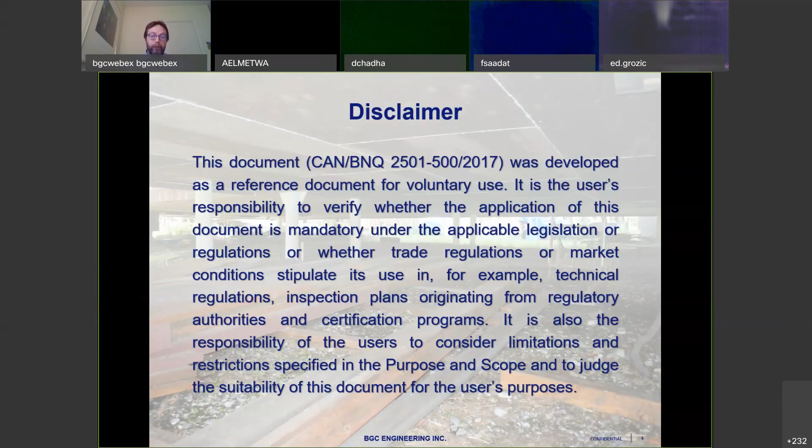Now, before diving into the actual standard, I also like to acknowledge that it's not just a one-person work. There are actually a large group of people that supported the development of this guidance. First of all, the Standards Development Committee. I'm not going to read all these names, but it's a large group under the chair of Sarah Brown. She was chairing this committee. And then there was the working group, which I had the pleasure to lead, as well as additional collaborators. All of these people helped develop this standard and made it possible that we do have this standard.

Now, the content of my presentation is in essence following the actual standard. So you will see the same headers and the same structure in the standard as you will see during my presentation. I will also have reference to specific sections of the standard that will show up in the presentation.

So we'll first start with the scope, we'll have a couple of definitions, then we'll go into how to plan the site investigation, we'll talk about the qualifications needed, and then the 2 levels that we propose for site investigation, which is a preliminary site evaluation and then the actual site investigation. And last but not least, the reporting and recommendation, which is an essential part of any geotechnical site investigation.

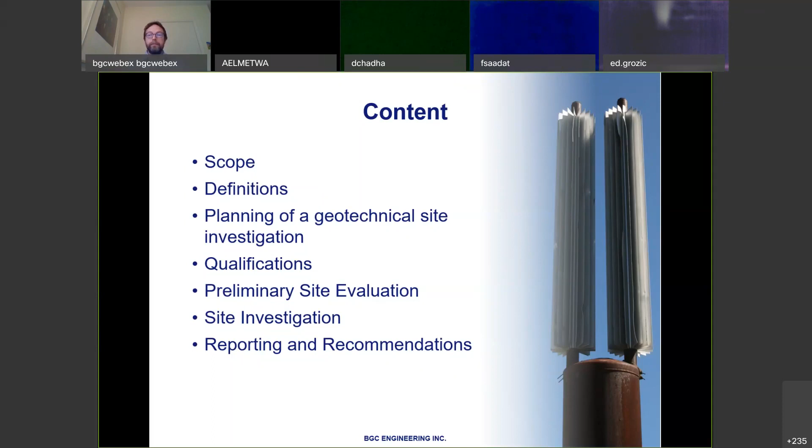Now, what is so special about the North or working in permafrost environments? The key here is that the permafrost, so the frozen conditions, make it challenging because we now have ground ice, and those that have worked in permafrost and in the North know that ground ice comes in various forms, different shapes, different colors, if you wish, and different temperatures. And the strength and the response of your foundation really depends on the response of the ground ice.

We also have saline soils. In particular, when you get close to the Arctic oceans, there are areas that have salinity. And when we have salinity, that affects the freezing point, in other words, how much of your ground is still frozen. So you may have unfrozen conditions at temperatures that are still below 0 degrees. So if we purely go by definition, then we would have permafrost, but it's unfrozen. So from a geotechnical perspective, this material acts like unfrozen material, but from a thermal perspective, it is actually permafrost. And on top of that, there is climate change.

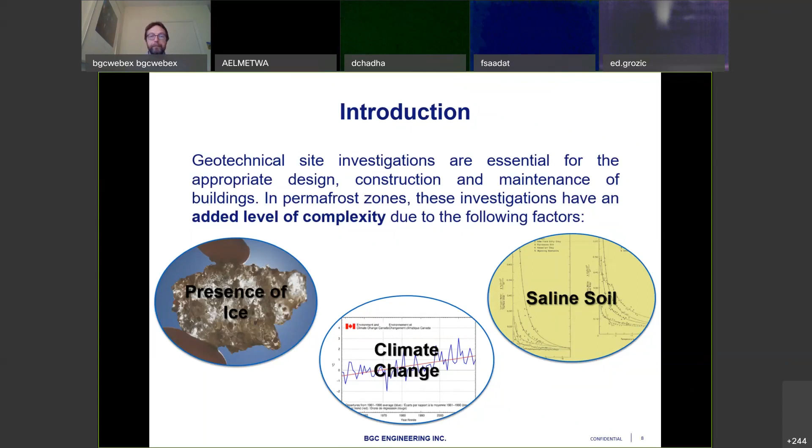Now, it's important to recognize that the level of detail of a geotechnical site investigation really depends on multiple factors. And that was one of the reasons why, when we developed this guidance, we didn't want to be too specific and too descriptive. So the idea is really to give the professional the tools to work and use their experience.

And also address the specific boundary conditions that we have in the Arctic. So it's really, this guide was developed to provide the information that will allow for the design and the maintenance of building with a reasonable time frame and cost. And we completely acknowledge that every case is different, it's not similar. So having just a one-fit-all solution does not work on all these different challenges that we see in the Arctic.

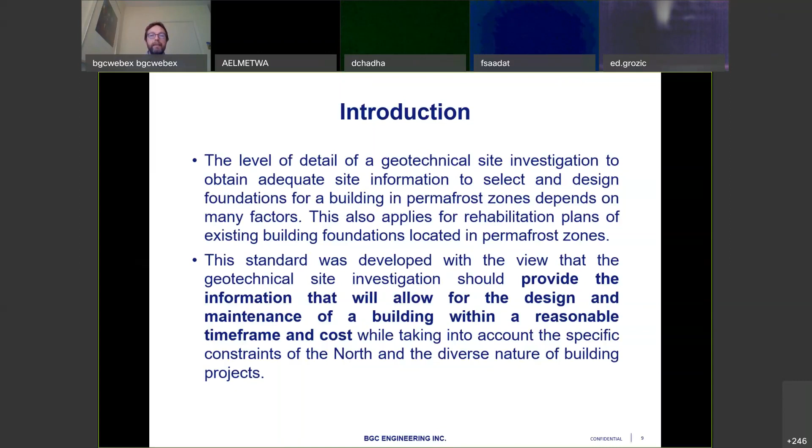And therefore, the focus of this document is to provide a consistent methodology. So the approach should be similar, so that geotechnical engineers, but also owners, understand what is to be expected and what needs to be done. We'll also focus on a dialogue between the designer and the owners, so that everybody understands where to go.

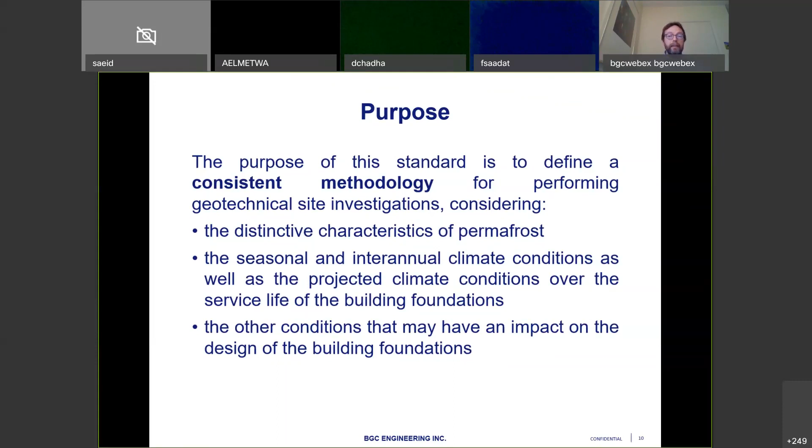And the key is to have these distinctive characteristics of permafrost addressed in your design. And that includes also the seasonal and interannual climate conditions, as well as where the climate is going to be towards the end of the service life of your building foundation. And there's also other considerations that may have an impact on your building foundation. So that leads us to the main scope of this evaluation, of this standard.

It is to provide the essential information so that a building foundation can be properly designed, or if you need to do some rehabilitation for an existing building. And both aspects are probably going to be significantly important in the future. So the principles laid out in the standards are specific to geotechnical site investigations, and it's really applied for buildings. So that's how we designed and formed this code.

However, it may also be applicable to other types of infrastructure. And we understand there are currently no standards, for example, for road embankments, or if you're working more in the mining sector, being it for dams, or if you have a sewage dam that you need to build. So the focus is really on buildings, but it doesn't mean that the general guidance cannot be applied to other types of infrastructure in the north.

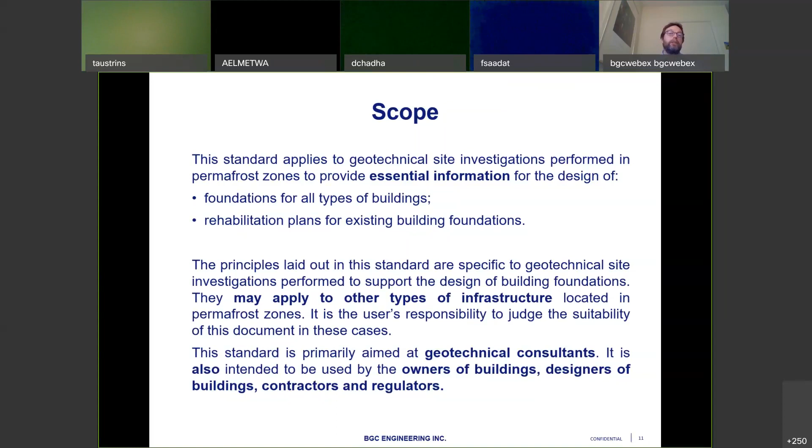And it is primarily aimed at geotechnical consultants, but it also is for the owners of the buildings, designers of buildings, contractors, and regulators. So it's to give everybody an understanding and a common language to talk when we do building foundations in the north.

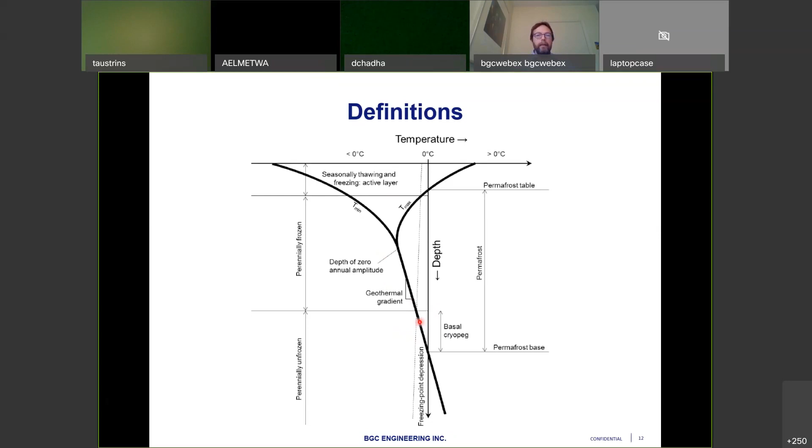And as well at the base, you could have a layer where the ground is unfrozen, so behaves like unfrozen soil, but is still in permafrost, where we talk about a basal cryopeg. And these aspects are important, for example, when you build your pile foundation. So you need to know what are the thermal conditions of your permafrost if you want to use it as your resistance.

The other parameter I quickly want to define is what is a geotechnical consultant. We provided that definition because the geotechnical consultant is ultimately responsible for carrying out the geotechnical site investigation for the client. In French, it's the expert conseil en géotechnique, just to be aware this is a term that comes with responsibility. As a geotechnical consultant, you have the responsibility to carry out and be responsible for the geotechnical site investigation for the client. You're representing the client, you're providing the client with that guidance.

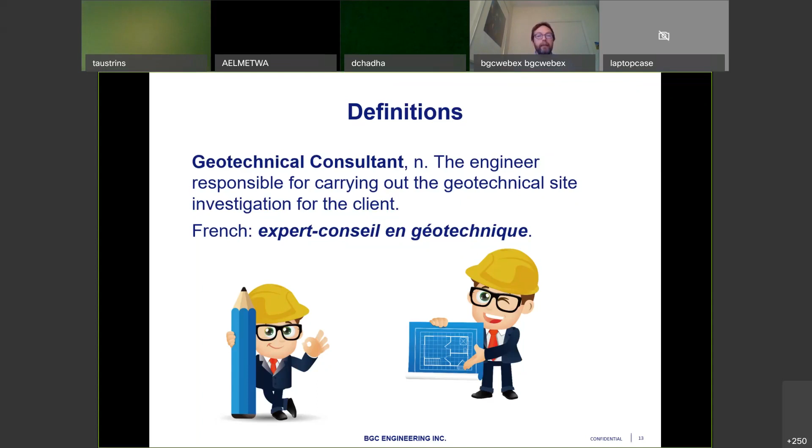The key with any report is that you provide recommendations. At this point, you recommend whether the site is okay and you have enough information, so you can go into foundation design. Or you think the site is okay but you're not sure, or you don't have enough information for proper design, so you go into your site investigation.

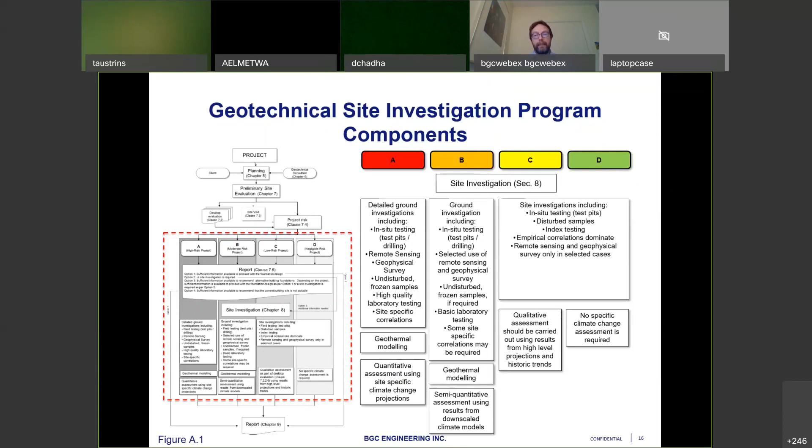Now, when we plan, the levels that we need are, A, we need to know our surface conditions. So we need to know what the building site looks like. What is the topography? Is it slope? Is it steep? Is it flat? Do we have vegetation? What is the surficial geology? What is the drainage, for example. So they're all aspects related to the surface conditions.

Next, we need to understand what is the subsurface. So what ice do we have? Where is the bedrock? If we have shallow bedrock and we excavate, or if we have deep bedrock, what are the conditions? What are the characteristics of the ground ice? What is your ground thermal regime? Because these really dictate what type of foundation you need. But also, what is the borrow material? Do I have a good gravel source or not? These external components are critical in your foundation design because they may drive the economics. If you do not have a gravel source, then suggesting a gravel pad is simply not an option, even if it's technically the best option.

And then the third element is the climate condition. Here we talk about seasonality, but also interannual climate conditions, multi-year variations. So we have larger scale climate-driven conditions, and then finally the projected climate change. What are the climate conditions during the service life of your building foundation?

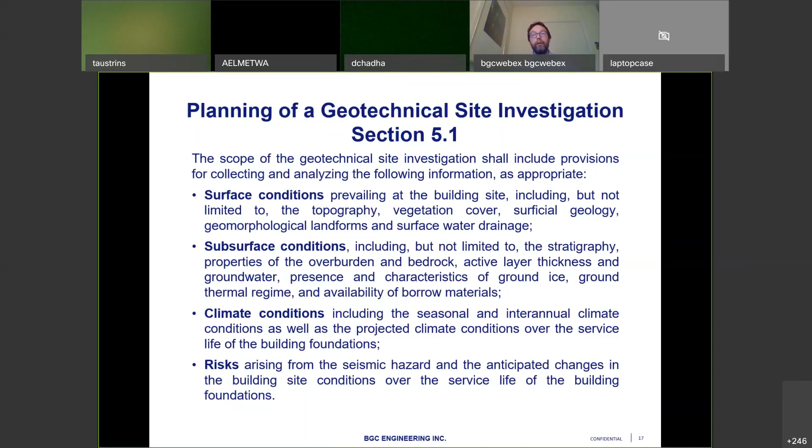So when we then start working with the client on this, it is important to have that common understanding. We need to know what is the building description. Where is the building? What is the configuration? What is the size? Above ground? Do I need a flat entrance? And so on. These are important considerations and should be made available to the geotechnical consultant right at the beginning. So yeah, what's the purpose of this building?

What are the operating conditions? How will you use this building in the future? And then we're going to see the loads. What type of loads do we have? What's the service life of the building foundation? And again, recognizing that the building may be retrofitted several times over the original foundation. That's not uncommon to do. What tolerances are accepted? And also, where do you have utilities or any other structures?

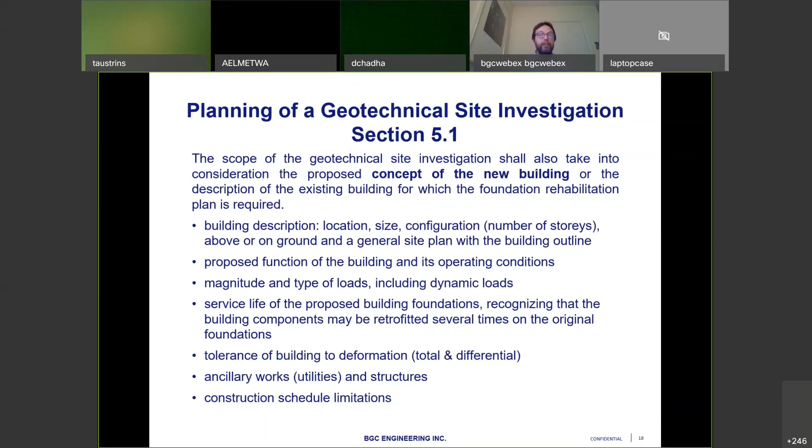And also, are there any schedule limitations? Access, whether it's workforce or equipment, can be very limited in remote areas. As such, the construction schedule can be the actual design criteria and the driver for why you use a certain design. That's, again, different from what's happening typically in the South.

And what the guidelines really want to focus on is this common understanding. It should not be that one party orders something and lets the geotechnical consultant do the rest, and then he or she comes up with a fixed solution, everything ready. It must be a dialogue, and it must be a common understanding that actually changes throughout the project. This is very important for a successful foundation design.

We also talked about the qualifications, and we had some lengthy discussions, and this is the text that is now in the guide regarding what qualifies you to work in these environments. Again, we didn't want to be very prescriptive and not just checking boxes in terms of what courses you took or what standards you apply. So first of all, yes, as a geotechnical consultant, you must be licensed to practice in your territory or province. That's not new. But it's also important that anyone working on this project shows the training, experience, and expertise that is relevant to the subject matter. You must have experience working in these areas, in this training.

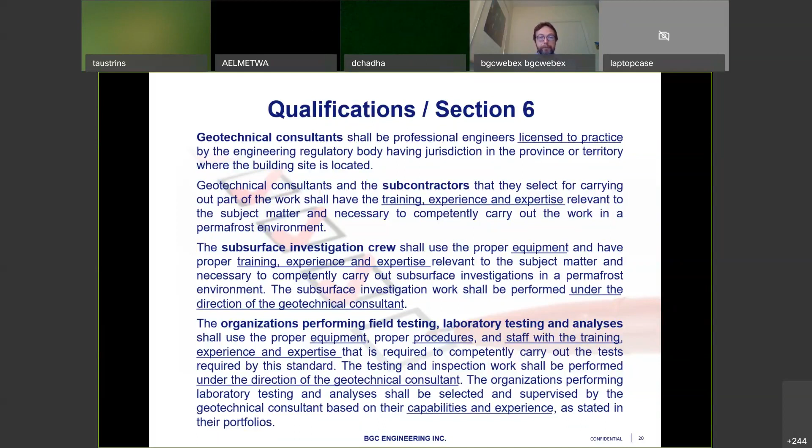Now, let's dive a little bit into those two steps that I initially described. So first, we have the preliminary site evaluation and then the site investigation. The key scope of the preliminary site evaluation is to assemble available information.

There isn't any site where there's no information. Typically, when it comes to building foundations, you're either already at a hamlet or a smaller community, so there's probably some sort of information available out there. That's why, in this first evaluation stage, we try to bring in the necessary information.

So that includes mainly desktop evaluation, and then, if considered necessary, an additional site visit. Then you do what I've explained earlier, that initial site risk level evaluation, which gives you guidance on where to go next if you need a detailed site investigation, or simply what level of information you need.

Do I have enough information? As an example, if during the site evaluation you see that you are at a level D, so there's no risk to your foundation due to climate change, then the information you have at this point may be sufficient to go into your geotechnical design. But if you have a high risk rating, then you may not have sufficient information to provide the foundation design at this point, and that triggers the next level of site investigation.

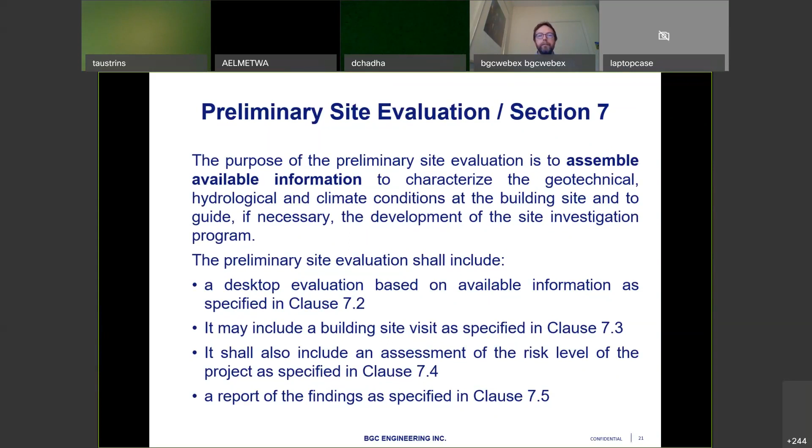And what do we need? For desktop evaluation, these are typically all sorts of aspects that we've been listing, but you, as a geotechnical consultant, need to decide which aspects are actually important. The guide or standard does not say you need to address every point; it just provides guidance, as I mentioned at the beginning, on what should be addressed. For example, we need initial assessment, seismicity, surficial geology, geomorphology, groundwater, vegetation, and permafrost characteristics. Those are all points listed not to be used as a checklist, but to give you guidance on what to do.

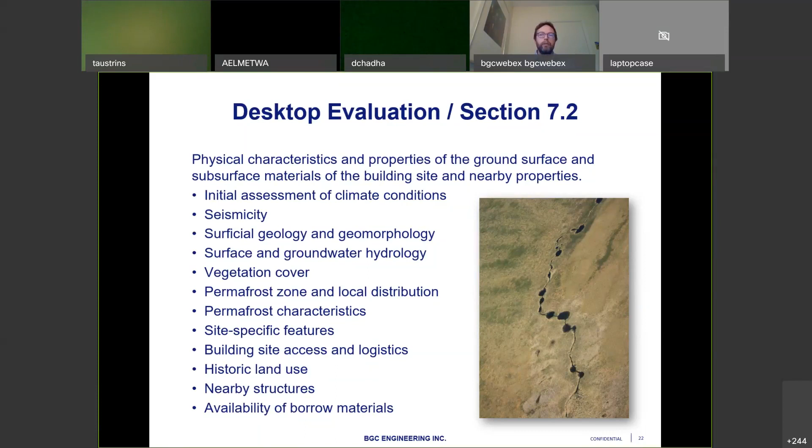And when deemed appropriate by the geotechnical consultant, a site visit should be considered. The key at this point is really just to validate the information you've been collecting during that initial evaluation stage. Some of the information may be outdated, so it's important to go out there and have a look. But again, it's a discussion between the client and the geotechnical consultant whether a site visit is important. Why did we hesitate to make it prescriptive at this point?

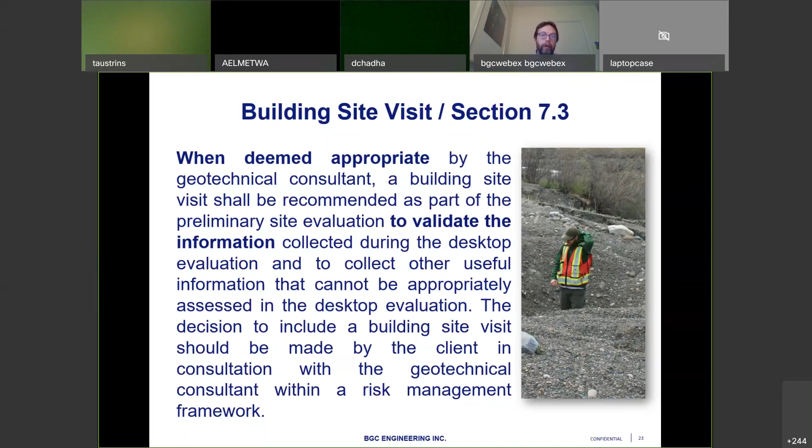It is also because of schedule. We're dealing with remote communities at times, and therefore it may not be practical, or it may delay the foundation design and construction significantly. But it's up to everybody to consider what the associated risks are with a certain decision.

Now, the level of risk that I introduced earlier, the D, C, B, and A, really comes out of this CSA plus 4011 document, so I refer to this document. It's also available, one of the NISI standards, available for free, and has very recently been renewed. There's a 2019 version, and it also has a technical guide that provides additional detail on design and construction considerations for foundations in permafrost regions. So there's a complementary document, I would say, to this BNQ standard.

And while I understand it's probably hard to read the figure at the bottom left, what it does in essence is evaluate the sensitivity of your foundation to climate change and what the consequences are. So if you have a high sensitivity foundation with a high consequence, then you end up in the A. If you have a low sensitivity to climate change and a low consequence, then you end up in the D. So it's not very sophisticated or complex, but it's a simplified level of evaluation that should be done.

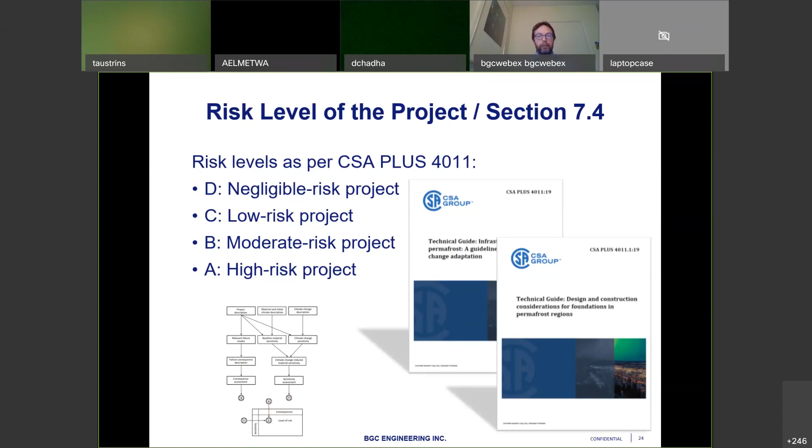Now, at the end of your preliminary site evaluation, which is section 7.5, you will come up with four options. So either you do have sufficient information to go into a design, or you do not have sufficient information to go into a design.

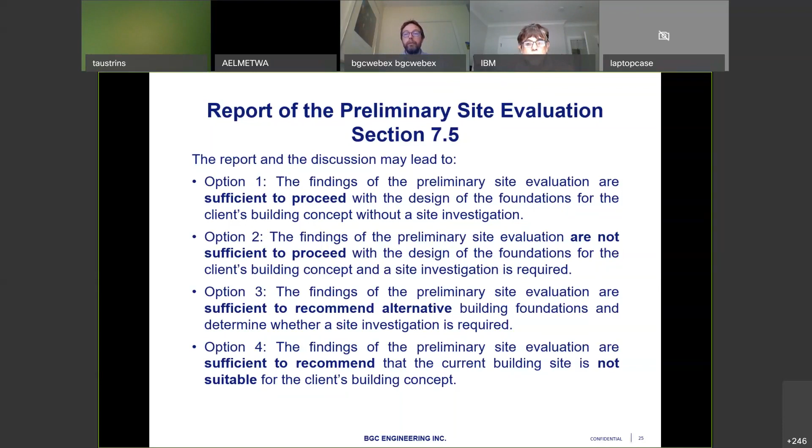Now, if we go into section 2, option 2, which is likely the most common case, then we go into a detailed site investigation. That really depends on different conditions, so what is your risk to your foundation? Here we're providing a set of methodologies that could be used to do this.

So you want more details on your climate change projection, for example. You want to reach out to climatologists or other sources to help understand your environmental conditions in the future. You want to use other technologies, remote sensing, for example InSAR, geophysics, and importantly, what are your soil conditions, your ground ice, your thermal conditions. Get samples out of the ground.

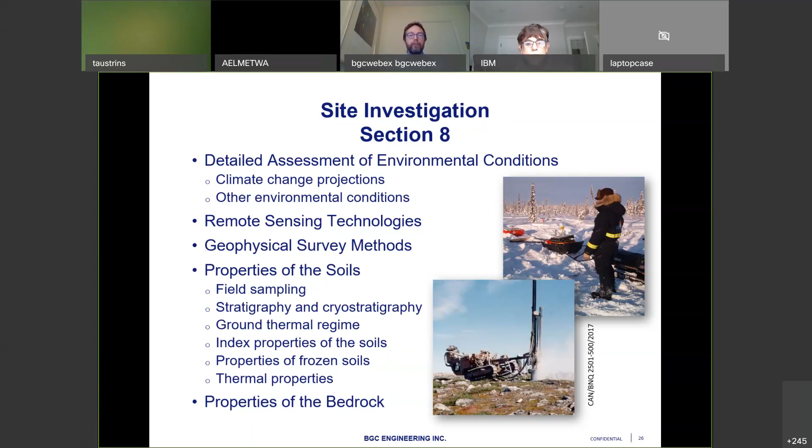The standard then provides all sorts of different methodology, and it also provides tables. This is Table D1 in an appendix, where in this particular case we're summarizing different geophysical methods that can be used, with pros and cons and commentary on those methodologies, understanding that they may not be applicable or available at all sites.

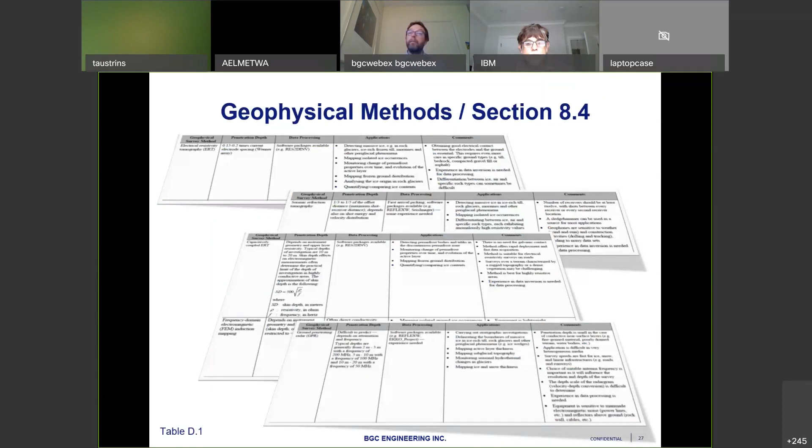We also provide guidance on test pits and drilling. For example, a minimum of 3 boreholes should be drilled at a building site to understand the heterogeneity. We also provide as guidance a minimum of 1 borehole for every 200 square meters, and they should go at least 10 meters, preferably 15, but for sure greater than the anticipated pile length.

There are two aspects to this depth. One is to really understand the ground thermal regime - where's the depth of zero annual amplitude, how do your permafrost temperatures look. The other part is, if you have piles, what is the adfreeze resistance? Because if you have a pile that freezes into its surroundings, you definitely want to know how the strength develops. We also provide recommendations in terms of sampling intervals and where those samples need to be taken.

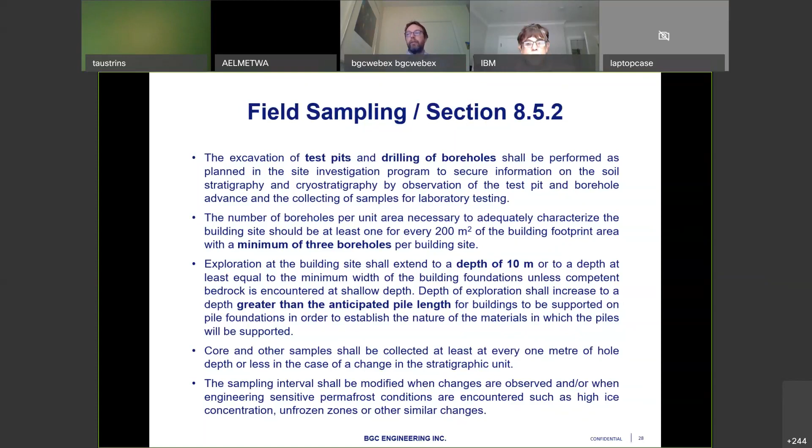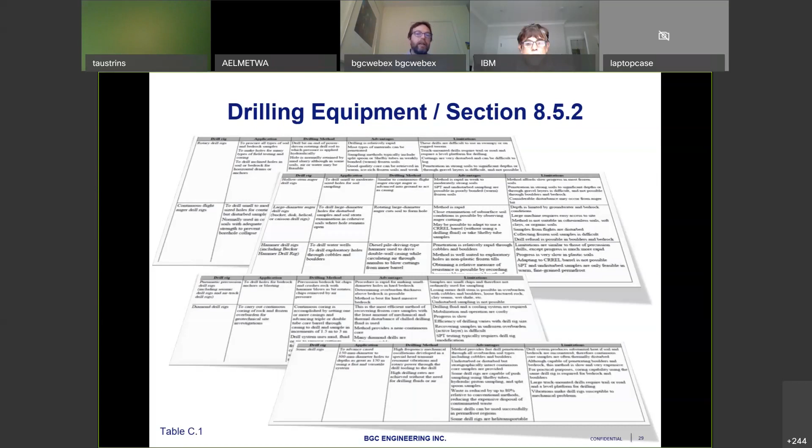Now, drilling - there are books about drilling, so we do not want to go into all the details. More often than not, it's really what equipment is available on site that dictates what drilling you're actually going to use. Nevertheless, we provided a couple of tables in Appendix C that show pros and cons for different drilling methods and sampling methods, from rotary drill to diamond drill or sonic drill and other lightweight or heavy drill. So there's a whole table that gives you a little bit of understanding.

When you have these samples, we also make recommendations on what you should actually evaluate. In addition to the standard classification between ice, no ice, bonded, well bonded, we also recommend using the cryostratigraphy based on Murton and French, as well as Linell and Kaplar, which talks about what type of ground ice we have. We also simplified the volumetric ice content into 5 classes: pure ice, which is essentially 100%, and then terms like ice-poor soil, ice-rich soil, and soil-rich ice. These 5 categories provide an initial assessment of the range of ground ice content.

We base this on potential settlement. If you have ice-poor soil, you do not expect a lot of thaw excess ice and thus a lot of thaw strains. But as soon as you get into ice-rich soils, the thaw strains can be quite significant.

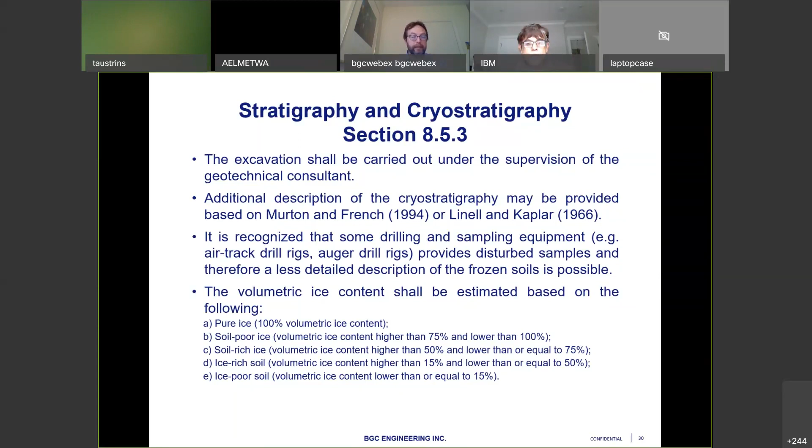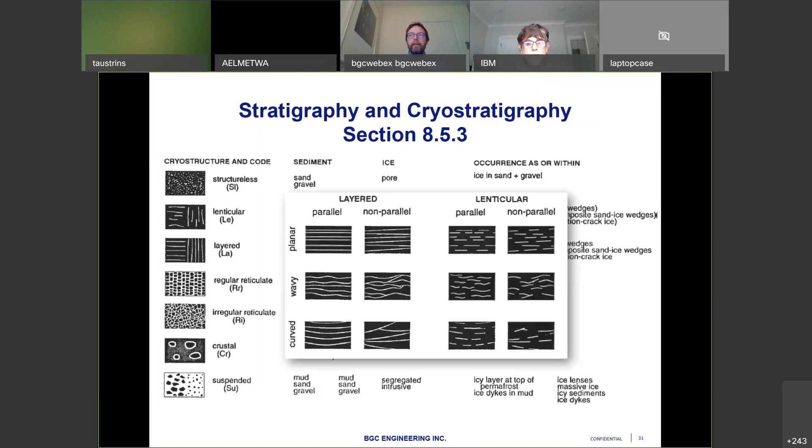I was mentioning Murton and French - this is their guidance where they look not just at how much ice you have, but what is the stratigraphy, and the cryostratigraphy in particular. Do I have structureless ice, lenticular ice, irregular reticulate ice, regular crustal suspended ice? If you make those descriptions, they help later to analyze where the ice came from, which for a designer can be important information regarding the strength that this material develops or not. We also have layered or lenticular ice, parallel or non-parallel. These additional details are strongly recommended when you do your logging of ice cores.

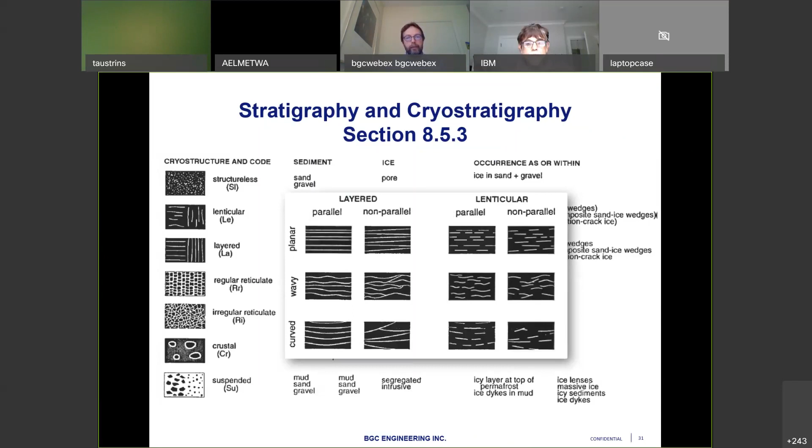Now, understanding your ice is one thing, but understanding your temperatures is the other aspect. Because if you have cold permafrost, your sensitivity to climate change is much lower compared to warm permafrost that is already sitting at 0 degrees. So if you're already at minus 0.1 or actually sitting at 0 degrees, a 1 degree warming has different consequences than if you are sitting at -4 or -5 degrees.

That's why it's so important to use ground temperatures to understand your changes over time, to understand what is the minimum, what is the maximum ground temperature, what is your mean annual ground temperature, for example at the depth of zero annual amplitude, but also what is your active layer thickness. Once you have your active layer thickness, that's also an important design parameter for piles, for example, or shallow foundations if you want to replace your material.

So having a good understanding is important. We do provide some recommendations on what instruments should be used—not in terms of a brand, but a thermistor string is definitely recommended, and a data logger is very strongly recommended these days. One also needs to keep in mind that when you drill, you generate thermal disturbance, so it's not sufficient to drill, lower a thermistor string, and measure the temperatures right away, because those temperatures are most likely affected by recent drilling. Having a monitoring data logger installed lets you see how the temperature changes, and once it's stabilized, that gives you a good understanding of your ground thermal regime.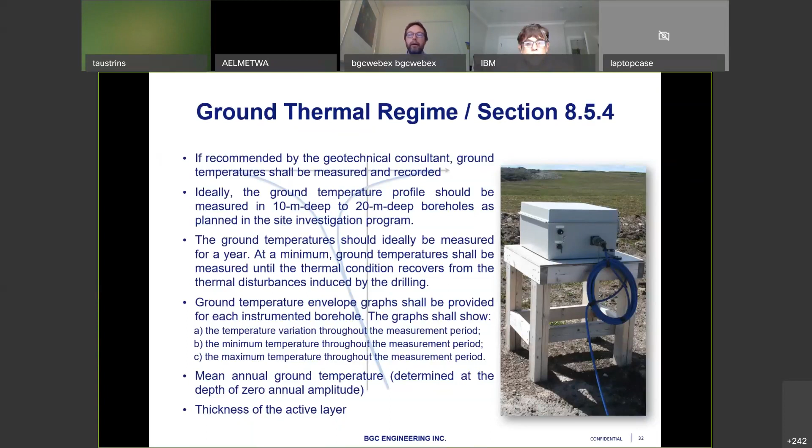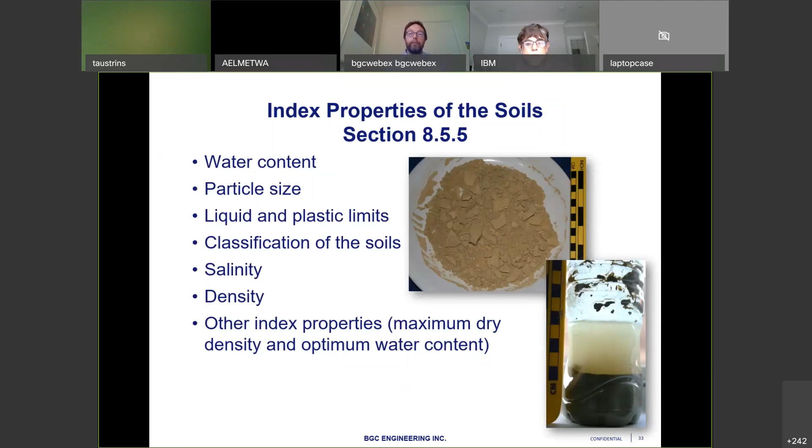In terms of what you look at for the soils, we have a list of recommendations—some simple index properties that we should look at, like any type of geotechnical investigation. The probably most important parameter here is you should not forget to measure salinity. As I was mentioning, salinity can change the freezing point depression, so measuring salinity of a sample should be a standard in ground site investigations in permafrost environments.

When it comes to frozen soil, you want to look at bulk density, thaw weakening susceptibility, thaw consolidation, unfrozen water content—depending on what type of foundation you have—creep, strength, and adfreeze. There are different parameters that should be measured and evaluated, but that depends strongly on what type of foundation you need. So we're not going to take undisturbed frozen samples and do all these tests for every site investigation, for every building foundation. That really depends on what type of load and what type of foundation you need.

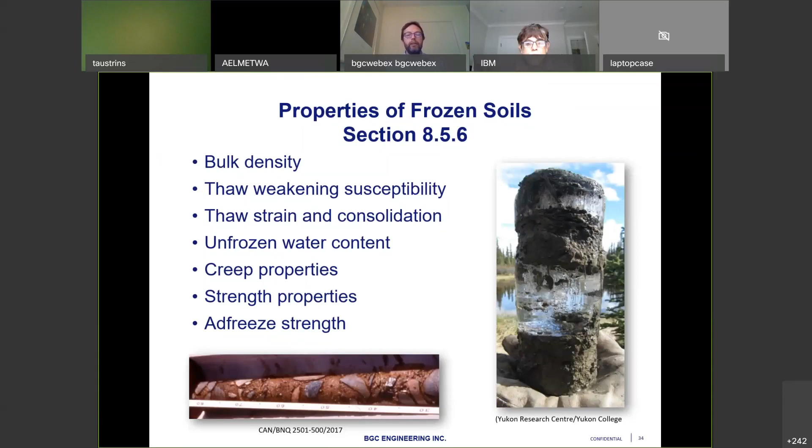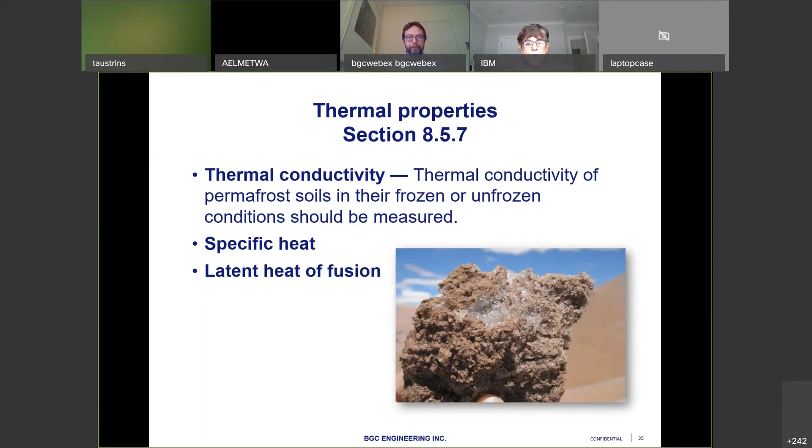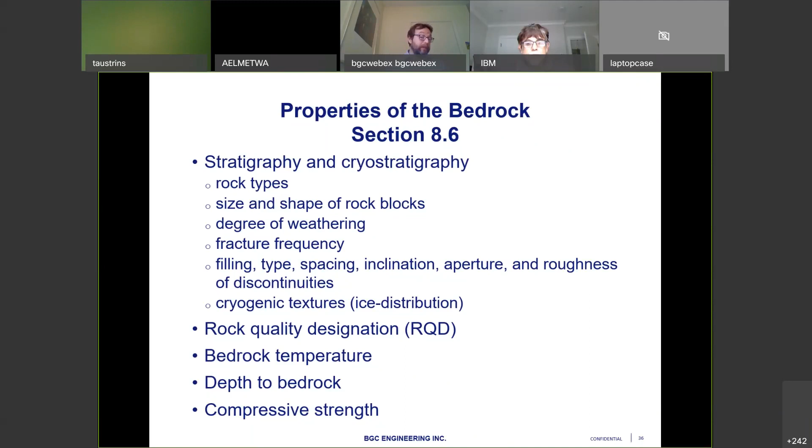Finally, when you have bedrock, these are the types of measures and properties you want to understand, including the cryogenic texture. Only because you have bedrock doesn't mean you do not have ground ice—there can be fissures and fractures filled with ground ice. You can have a significant amount of ground ice even when you think you have bedrock. So you want to understand what the bedrock is, what its temperature is, and whether you actually have ground ice available. Again, the guideline provides some drilling in bedrock information, a table in Appendix C, with different types of bedrock drilling and some comments.

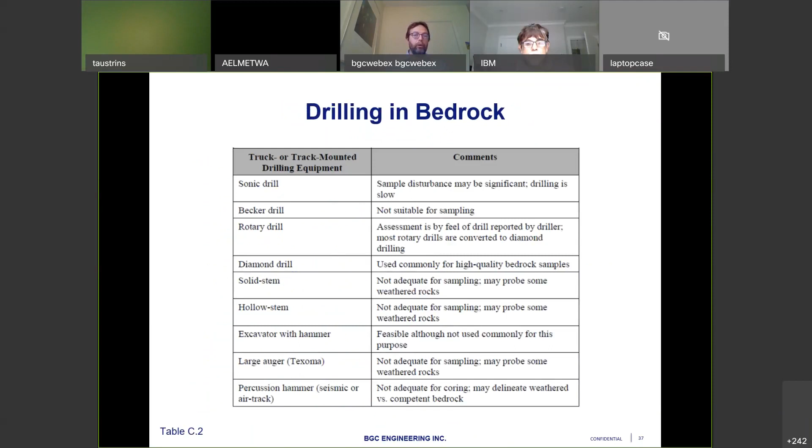Now, the final section, which to me is the critical section when it comes to transferring your information to your client, is the reporting. Section 9 provides a clear structure of what should be included, which points should be mentioned in your report.

So obviously you do have your scope, you need to discuss the climate condition. If you're in a seismic zone, you want to talk about the seismicity, surficial conditions, and so on. It provides a structure of how you develop your work and how to communicate that to your client. You can also see we want to talk about historic land use—historic land use can cause disturbance to your foundation. If a building has already been at the site, your ground thermal regime looks different than a site where no building was there. So understanding what your site's been through is also a critical element.

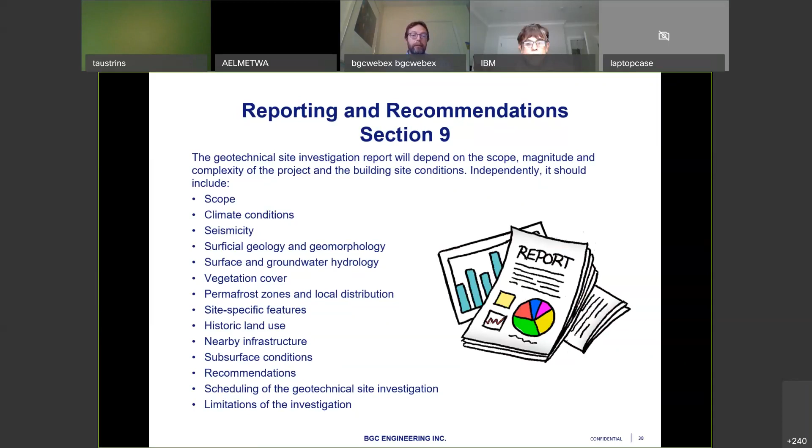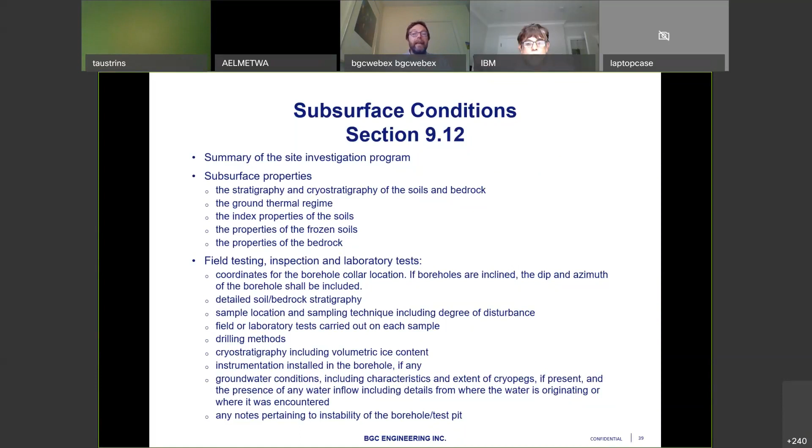And here, under section 9.12, without reading every bullet point, it provides you with the information that you as a geotechnical consultant should put in, but also what the client is expecting. So that document also helps clients see what they should expect from their geotechnical consultant in one of those reports.

And last but not least, the recommendations. Having done all the site investigations, that should then lead to the recommendations. As I mentioned, we're going into either: I have enough information to do a proper design of my building foundation; I have enough information to say I need to alter my design, but I can design; or at this point you say this site is not suitable, or maybe you need additional information. Those are the options, and they need to be clearly developed in the geotechnical consultant's report so the client understands what is needed and where to go in the next step.

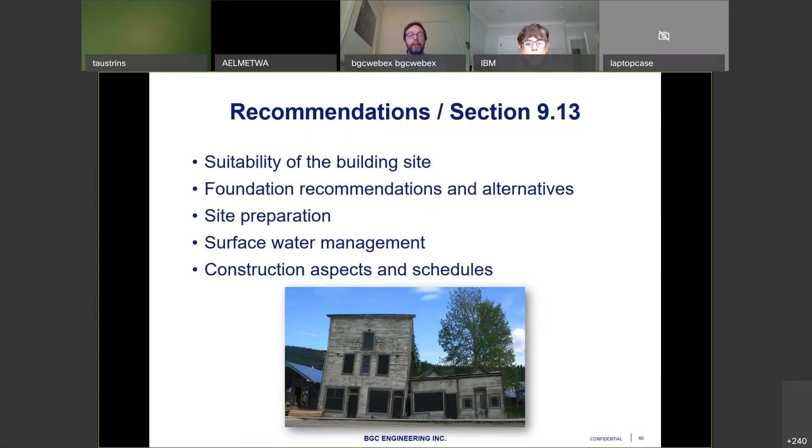There's one point I want to mention: the construction aspects and schedules. We haven't talked about those here, but there's also a table, section 9.14, that addresses some of those constraints. If you have to build your foundation, or do your site investigation, in the winter, it's different than if you do it in the summer. So the scheduling, either on the site investigation or on the foundation construction, can often be a driver on what type of foundation design you come up with.

We provided a couple of comments regarding seasonality, which is so important, particularly in the Arctic region. One is the climate conditions themselves — working under certain conditions is difficult. Second is the ground: if you're working in the winter, your active layer is frozen, versus working towards the end of summer, where you have unfrozen active layer that gets you down to the permafrost table easily with a backhoe. Not only that, access to equipment and mobilizing certain equipment is easier depending on where you are at certain times of year.

If you have access to a winter road, then certain equipment can be brought in during the winter, but you must be sure you complete your site investigation while the winter road is still open, to get the equipment out. If you have to rely on barges, that's a different story, or you just rely on the equipment available in that particular community. So there are a lot of aspects that play a role when we talk about site investigation and foundation design in Arctic regions.

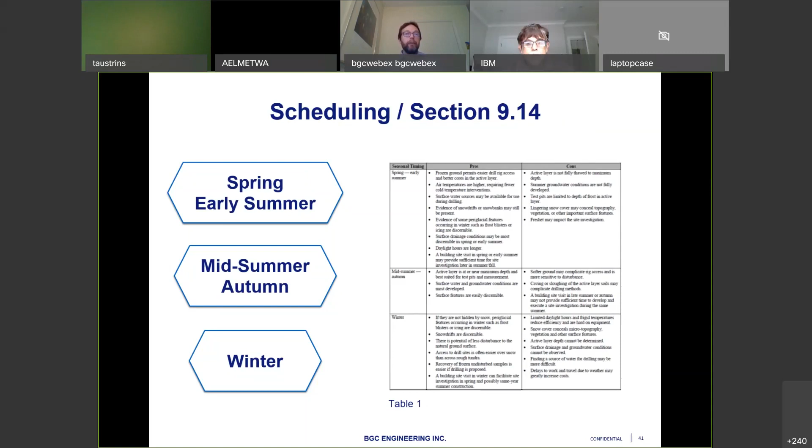And that was, in essence, a brief overview of this guide that we have. I'm happy to take some questions. I just want to mention again that the guideline documents are available for free download from the BNQ website, and you'll find the links in the specific sections.